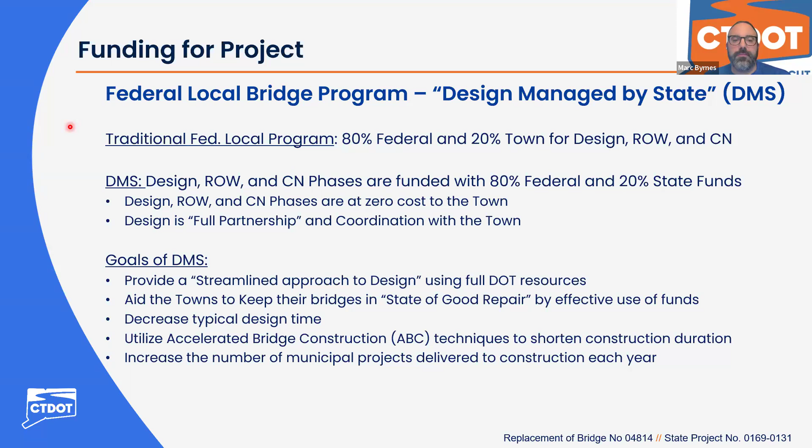Representing the Department of Transportation: Derek Lassard, Division Chief of Bridges. As I said, my name is Marc Byrnes, I'm the supervising engineer for this group, the CLE group. Michelle Rame is the project engineer for this project, and Jack Carlson is the project coordinator for the Office of Rights-of-Way. Representing Clough Harbour and Associates, the department's on-call firm for this project, are Anand Sasadri, CLE team leader, Dionys Quezada, CLE project manager, John Pirelli, CLE highway lead, Pete Parent, hydraulics engineer, and Sarah Manston, environmental scientist.

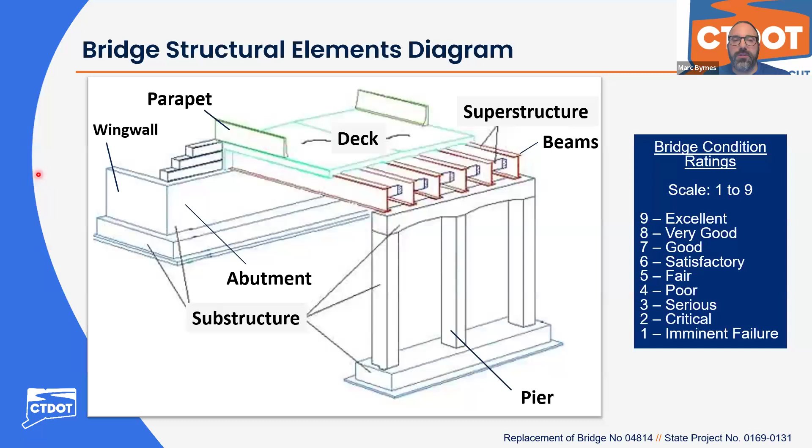The town of Woodstock is represented by First Selectman Chandler Paquette, who unfortunately could not be in attendance tonight, but we've given him a presentation and the town is in support of this design.

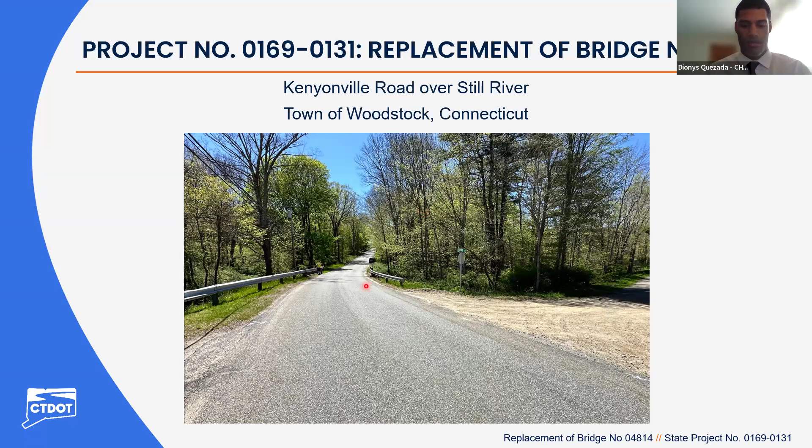The bridge location is on Kenyonville Road, south of Route 171 and west of Route 198, which turns into Eastford Road that goes on to Eastford. The Woodstock town line is very close to Eastford, near this bridge. There is also Westford Road located south of this bridge, and Crystal Pond Road, which is close to the southwest corner.

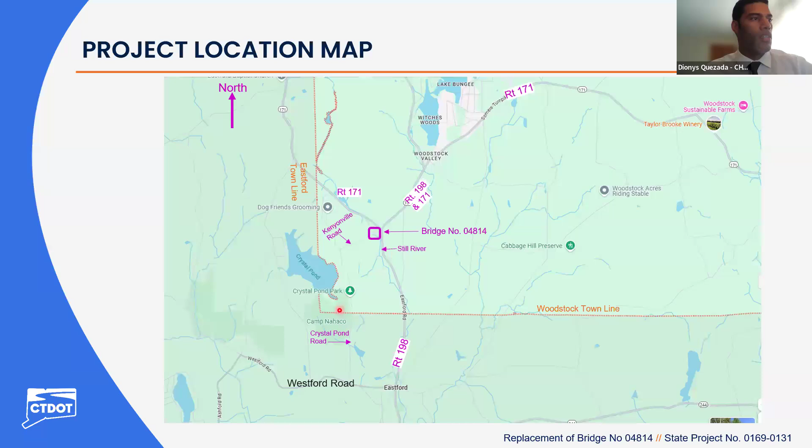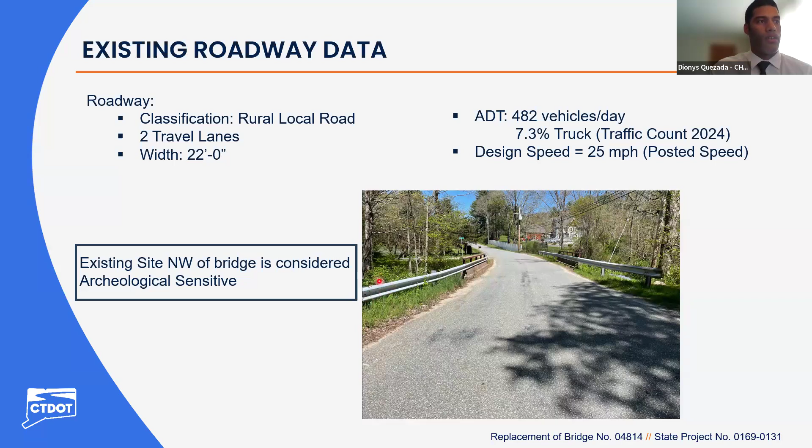The existing site at the northwest of the bridge is considered archaeologically sensitive, as there used to be a historic mill there. The bridge itself was constructed in 1947.

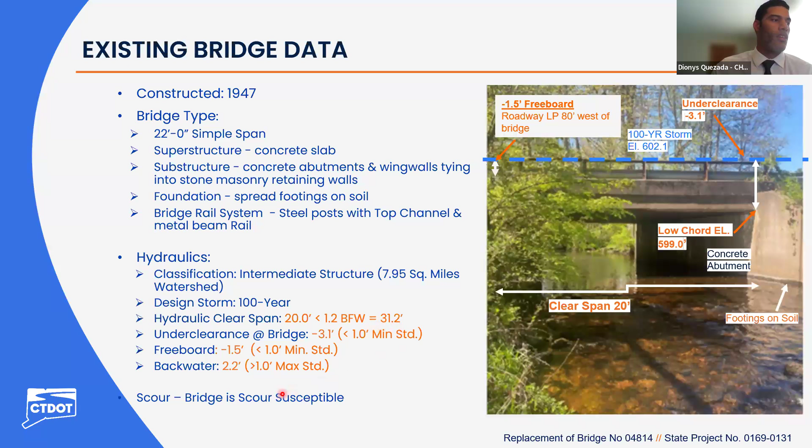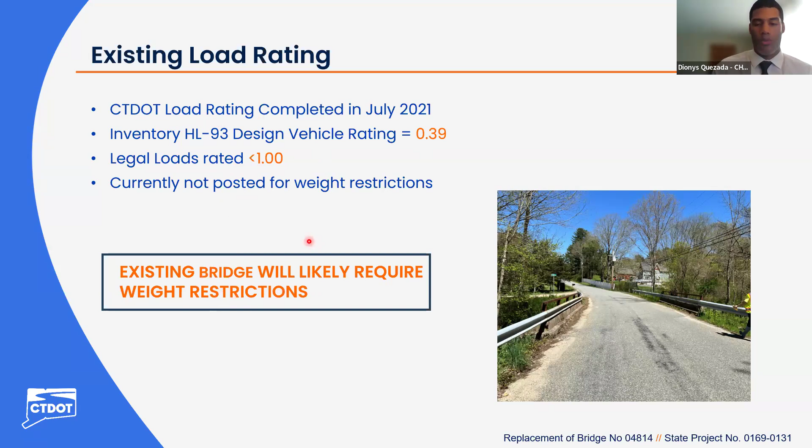The bridge is scour susceptible, which is a condition we look for in design. For the Connecticut DOT, they did a load rating back in July 2021. The inventory HL93 design vehicle rating came out to be 0.39, and legal loads rated less than 1.0. This means the existing bridge will likely require weight restrictions, and it's currently not posted for those weight restrictions as of today.

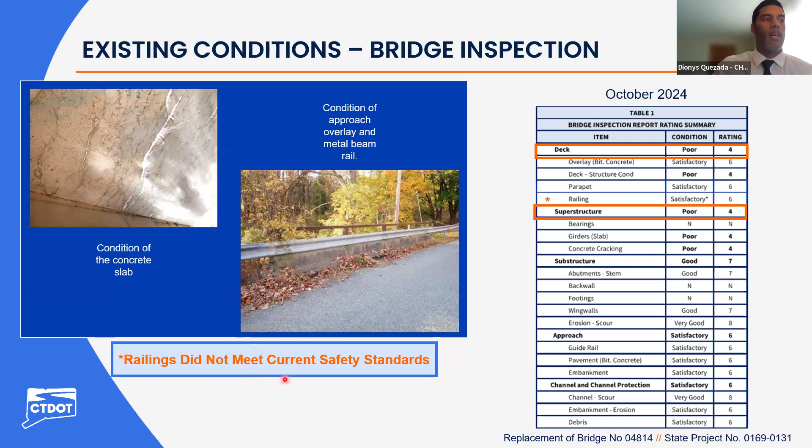The substructure, the approach, and the channel and channel protection are all satisfactory or in good condition, rating from 6 to 7. However, the railing, also rated satisfactory at a condition of 6, does not meet current safety standards, which is something we will be addressing in design.

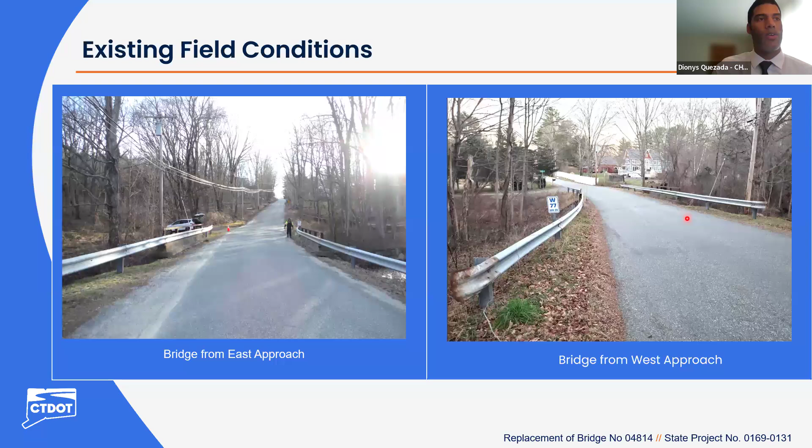Here are some conditions out there at the bridge. This is looking at the east approach. Note the utility poles on the south side of Kenyonville Road. This is the bridge looking at the west approach, and this is looking east.

This is further east, at the intersection between Kenyonville Road and Pond Road. Further out, you can look at Route 171, more east of the bridge. This is Pond Road looking north.

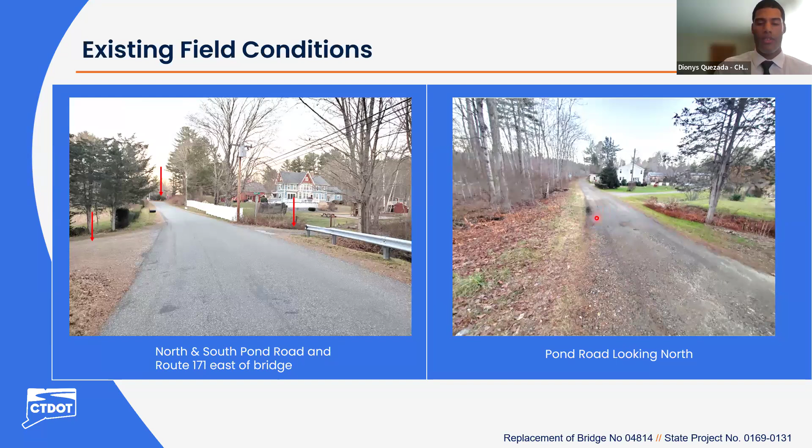Underneath Pond Road is a channel, which now comes out in an open drainage channel and merges with Still River upstream of the bridge. If you look from that same location to your right, there's a driveway adjacent to the bridge that has a drainage pipe underneath.

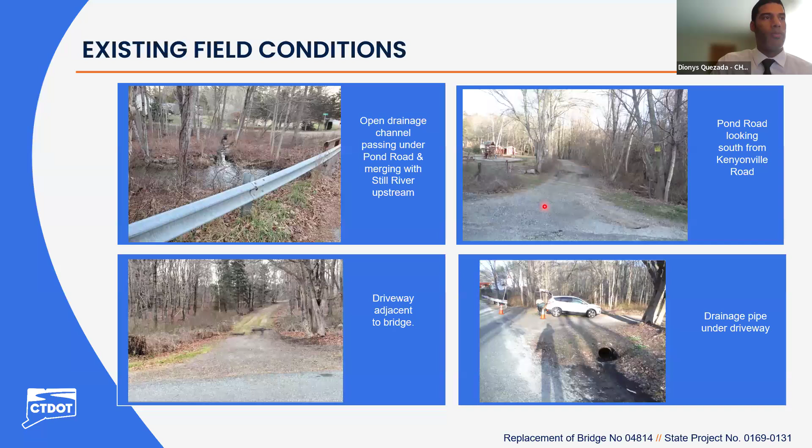That's all going to be part of the project and replaced. Further out into Pond Road, looking south, there is also another drainage pipe that will be replaced underneath. Those are the conditions of what's out there today.

This is the typical north abutment and south abutment view. Like I said, it's in satisfactory condition. However, the slab, the concrete slab, shows a lot of efflorescence and map cracking.

On the northwest side of the bridge is the archaeologically sensitive area. As you can see, there's a lot of stones. It is our understanding there was a mill there, which is historic, and we are trying to stay away from it, so no impacts are anticipated.

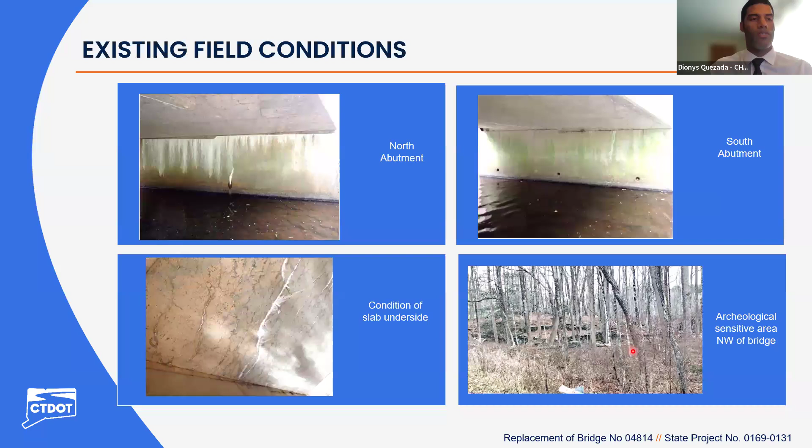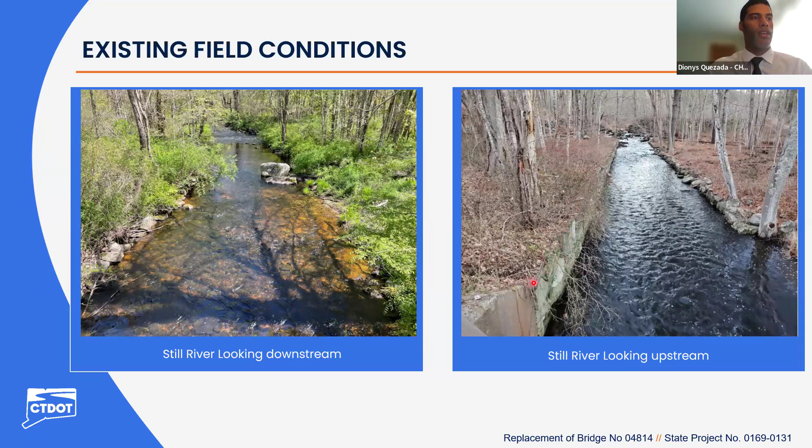This is Still River looking downstream from the bridge, and this picture is looking upstream from the bridge. There's this wing wall attached to the existing retaining wall that you can see here from this property. That's all part of construction.

Given all the existing conditions, the project purpose and need is to increase the load rating capacity of the bridge to carry legal loads and avoid weight restrictions as there are today, address the poor condition of the deck and superstructure, improve hydraulic adequacy and performance, eliminate scour susceptibility, increase the roadway width from 20 feet to 24 feet, and replace the bridge and approach rail system to meet current safety standards.

The bridge has been in service for 78 years, and the typical service life is between 50 and 75 years. So this bridge is at the top of its service life.

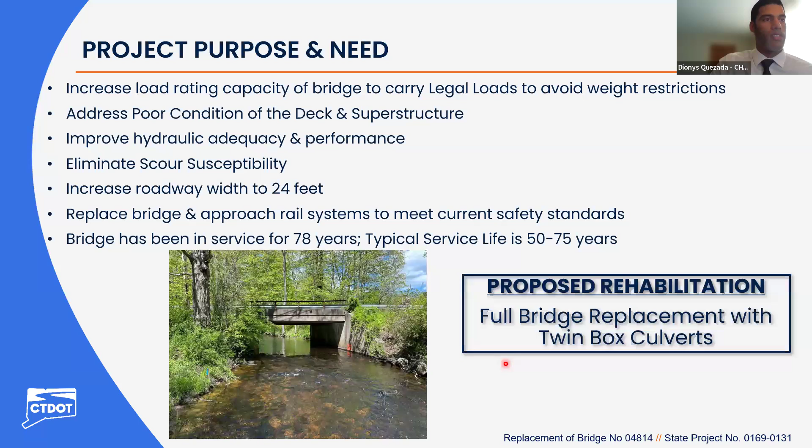This construction will safely carry AASHTO design, legal, and permit vehicles with no weight restrictions. It will have a 24-feet wide roadway, an open bridge rail, an approach rail system meeting safety standards, and it will improve the hydraulic performance.

As I mentioned before, the 1.2 times bankfull width was 31.2 feet. The clear span on this proposed condition will be 32 feet. That will help the hydraulic performance, creating a negative 0.8 under-clearance, much better than the existing negative 3.1 feet; a 0.5 freeboard, better than the existing negative 0.15; and a 0.1 backwater elevation, better than existing, which is 2.2 feet.

This recommended alternate is an easier bridge to construct without the need for pile foundation, and it's also lower in initial and life cycle cost than other alternates we looked at. It provides a 75-year service life with minimal maintenance.

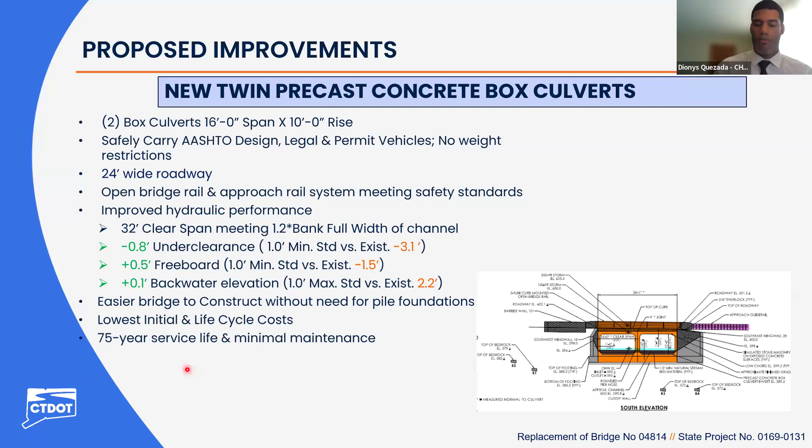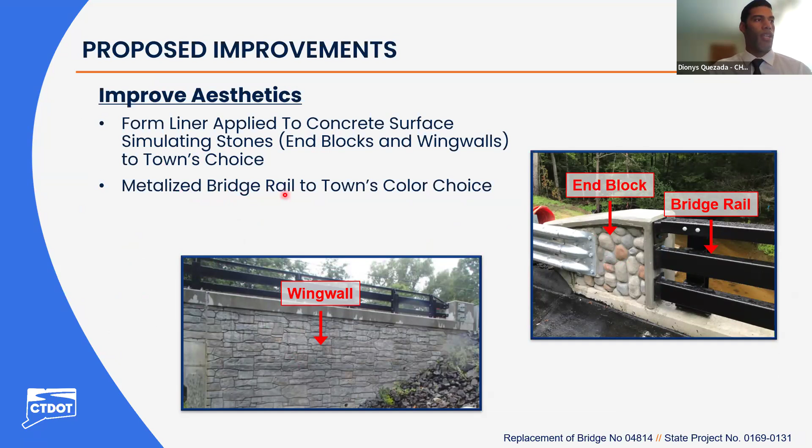As part of this bridge, we have also placed form liners on the concrete surface that simulate these stones. This is for the wing walls, and this is for the end blocks. These improve the aesthetics of the bridge, and that's up to the town's choice. Also, the metallized bridge rail color is up to the town's choice.

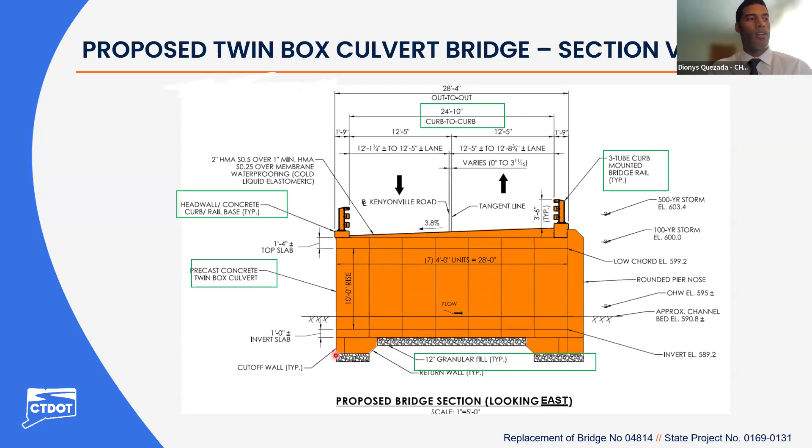The precast concrete twin box culvert, as mentioned, has 10 feet of rise - that's what this big orange square shape is. It consists of 7 4-feet units; that's how it gets constructed. It all sits on top of 12-inch granular fill, and there will be a cutoff wall to prevent any undermining.

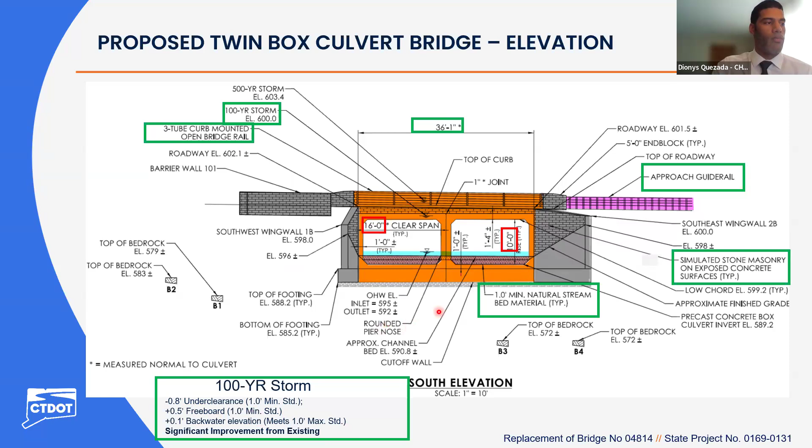Overall, this alternate makes it better for the 100-year storm, creating a negative 0.8 under clearance. The minimum standard is 1.0 feet. It creates 0.5 feet of freeboard, getting close to the minimum standard of 1 foot. And the backwater elevation of 0.1 actually meets the standard, which is a max of 1.0 feet. It's a significant improvement from existing conditions. That's why we like this option.

With the reconstruction of Kenyonville Road, I will get more into it. It's going to be raised just a little bit. In pink, you can see the guide rails.

They're meeting standards, there's 3 of them. However, on the southwest corner, there's going to be a barrier wall that's flared out to protect from vehicles.

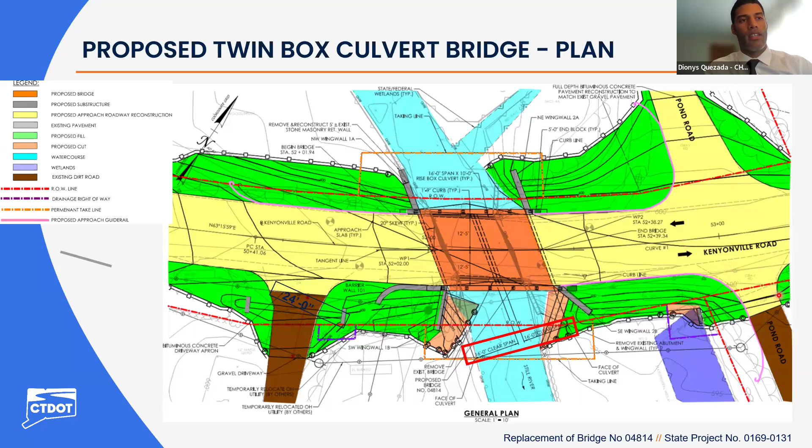Here, there's going to be some pipe, as I mentioned before in the images, that's going to be replaced in kind. There's one here on this driveway, and then there's another one underneath Pond Road. Those are going to be replaced.

Here's a bigger overview of the project itself. Pond Road, most of it is going to maintain the same dirt road as existing. However, there is a portion that's going to be fully reconstructed and paved.

Here you have the limits of the wing walls. There's going to be some taking line, which we'll talk more about later. And you have the drainage here on a more zoomed out look. Here's going to be some drainage end walls proposed to better create a drainage sheet flow.

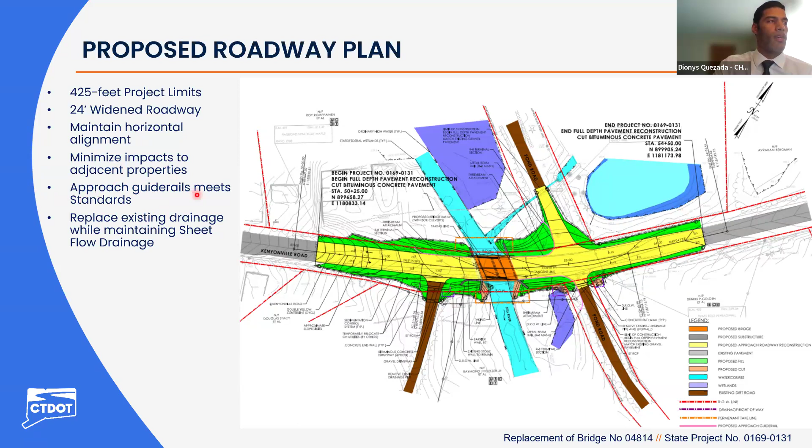Project limits: 425 feet of project limit, a widened roadway to 24 feet. It will maintain horizontal alignment as existing, minimize impacts to adjacent properties, and as I mentioned before, the approach guide rails will meet the standards.

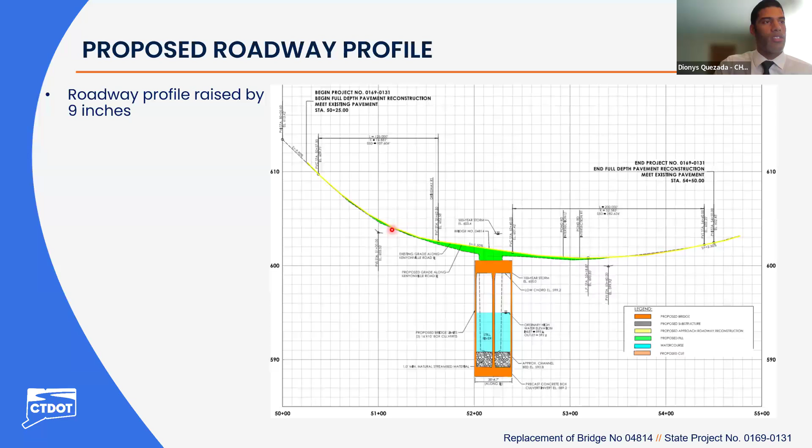Overall, when looking at the alternates, we looked at a detour 4.8 miles long, using East Fort Road into West Fort Road and then Crystal Pond Road. This detour is recommended since there's a temporary bridge option which was not selected because of a potential archaeological impact to the northwest corner. Due to this, for the negative impacts, we believe a detour is the best way to go about this.

For the detour, the schedule will have at least one lane always remain open until summer vacation begins. Once summer vacation begins, a full road closure for 10 weeks will start. When school starts again in fall, at least one lane will then be open to make sure bus traffic can pick up kids and use Kenyonville Road, and it will also be open to the public during those times as well.

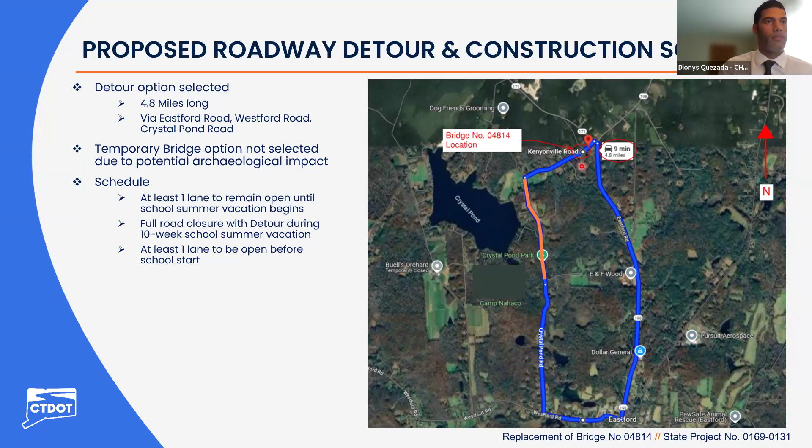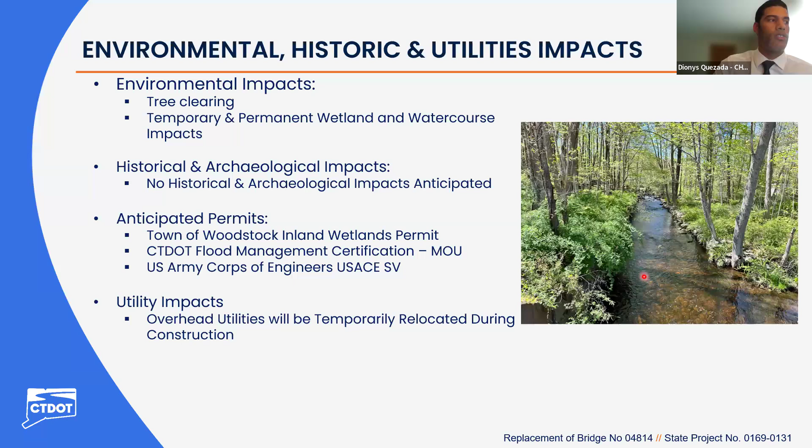There are utility impacts as well. As I mentioned before, there are overhead utilities and poles on the south side of the bridge. Those are going to be temporarily relocated during construction.

Again, here's more of a view. I know there's adjacent property owners. The impacts are 2 permanent takes. So right at the edges of these wing walls, there's going to be some take for the construction and also for maintaining those wing walls in future years. Also at the south side, there's another permanent take right at the edge of the bridge.

There's going to be drainage right of way for this one here. There's going to be reconstructing of those end walls and that pipe that goes underneath Pond Road. And because of the increase in the roadway, there's going to be some slope easements. As you can see, the green area does go beyond the town line right of way, so those are just slope easements during the construction.

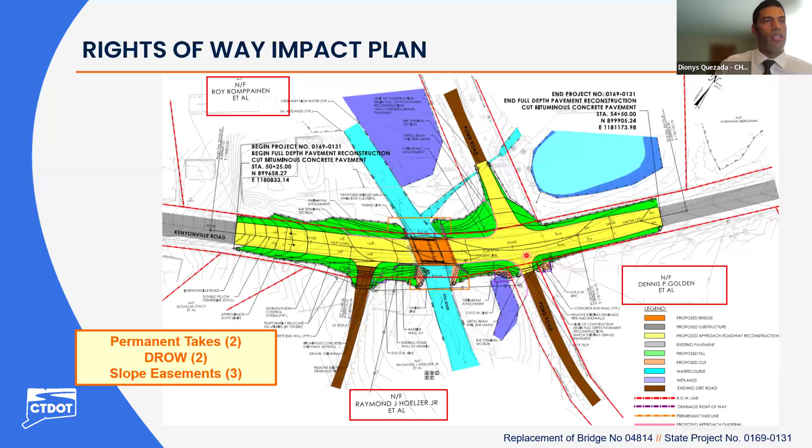I'm gonna pass it on to Jack for the right of way. Thank you, Dionys. Good evening. My name is Jack Carlson, and I serve as an assistant project coordinator with the department's Division of Rights of Way. Our office is responsible for acquiring the property rights necessary to carry out transportation projects.

As mentioned earlier in the project presentation, this project will require the acquisition of property rights. I'd like to take a few minutes to walk you through our acquisition process. Before I begin, please note the specific right-of-way impacts are still being finalized and may change as the project design progresses. Additionally, any needed property rights will be acquired in accordance with Connecticut General Statutes Section 13A-73, as well as 13A-98E, as well as the Uniform Relocation Assistance and Real Property Acquisition Policies Act, commonly referred to as the Uniform Act. Next slide, please.

Next, we will establish the fair market value of the required property rights. This valuation forms the basis of our offer of just compensation, which is provided to the property owner in writing. A rights-of-way agent will then be available to meet with the property owner to explain the project details, discuss the specific impacts to their property, and go over the department's offer. Property owners will then have a reasonable amount of time, typically 30 days, to consider the department's offer and enter into negotiations with the department.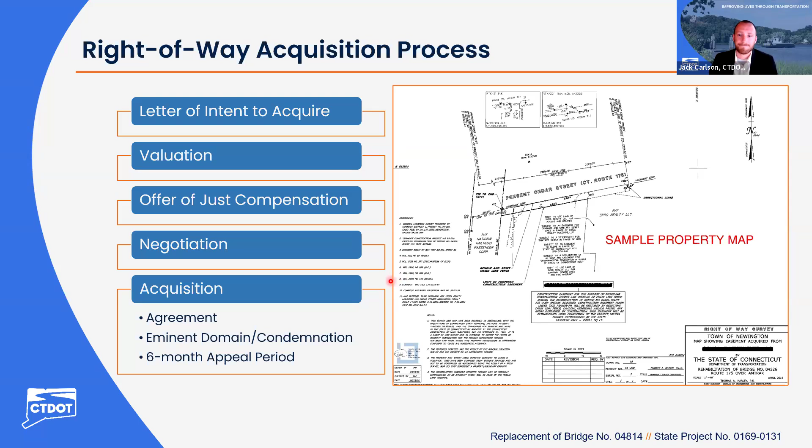Hey, Dionis, you're muted.

Thank you, Michelle. Yes, so the anticipated schedule for design completion date is estimated to be December 2, 2026. Advertising December 30, 2026. Construction is anticipated to start in spring of 2027. The construction duration is anticipated to be one season, 8 months straight, and construction cost is $3.46 million.

80% being federal funds, 20% being state funds. No cost to the town of Woodstock, and I want to point out that the costs and schedule are preliminary and are subject to change.